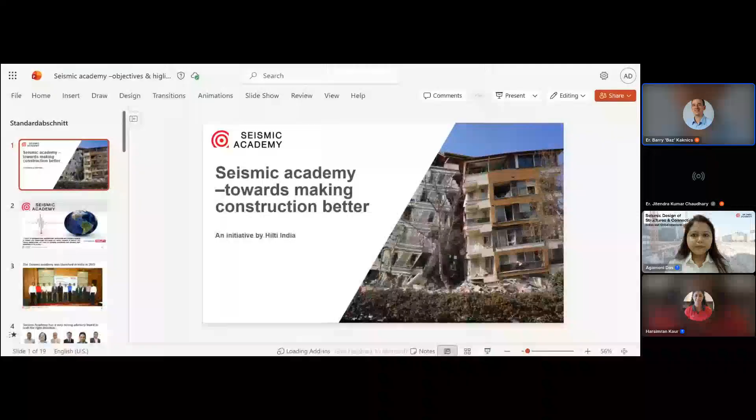This academy was launched in 2019, and we have a very strong advisory board with us from academia and industry, and we engage them through different activities.

You can see on the screen some quarterly and trimester activities we do, like quarterly webinars, the second one being today's. We do a lot of workshops frequently with IITs and different associations. We release trimester publications on seismic topics, to exchange knowledge, gain expertise, and elevate it further.

We also try to be involved in all the national level conferences organized by major associations in India. We present technical papers there, and we are involved with some IITs through research and testing based on requirements and industry objectives.

We also conduct an annual conference every year, generally in October. We have a dedicated website where we publish this kind of information on earthquake related topics.

This year we also started one online event, a quiz competition, and we got good participation there. The quiz competition was on the topic of earthquake safety and strengthening of structures.

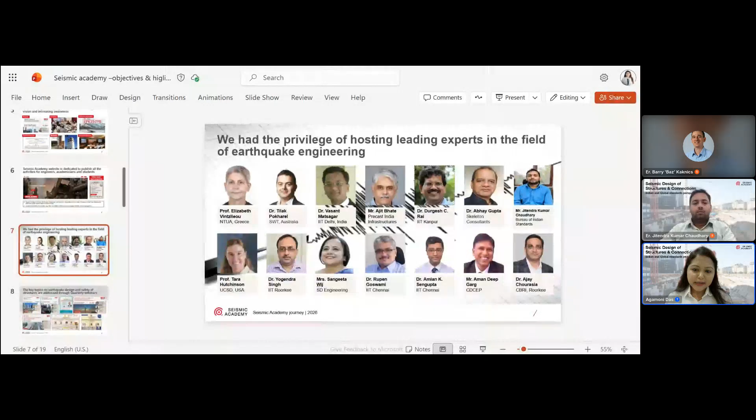We also had the privilege of hosting leading experts in earthquake engineering from academia as well as industry. These are some topics very much related to earthquake design and safety of structures that have already been covered through webinars and journals.

We have a close collaboration with NIDM, BIS, BMTPC, DDMA. We are also associated with Indian Buildings Congress, Indian Association of Structural Engineers, ISC, IIT, ICSRI, and other platforms. This is a sample of research and testing which we conducted at IIT Roorkee.

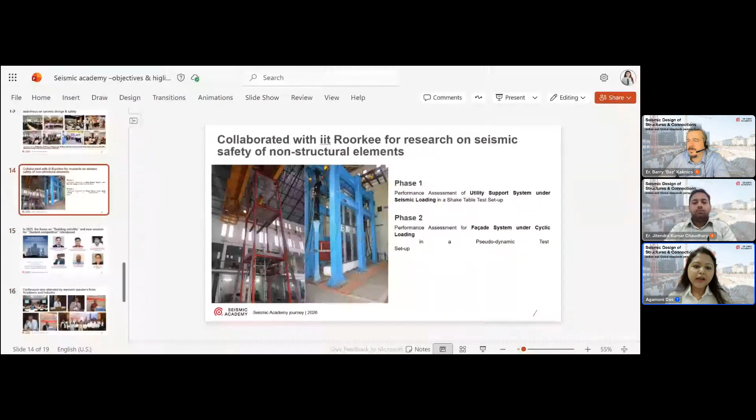In 2025, the conference topic was building retrofits, and this year the conference date is 23rd October, a Friday, with the topic seismic strengthening from shed to safe.

We have already released the preliminary flyer and agenda, which I'll be sharing here as well, and the final agenda will be decided by July. I'll also share it with all participants, and we really welcome you to participate and contribute. With this, I'll end my part.

Let us come together to make a meaningful impact, because Seismic Academy's objective is engineering resilience through seismic excellence.

With this, I will introduce our speakers for today's main technical sessions. We have Engineer Jitendra Kumar Chaudhary with us. He has over 5 years of experience in standardization related to building materials such as cement, concrete, supplementary cementitious materials, testing of cement and concrete, pozzolanic materials, concrete mix design, design of concrete structures, earthquake resistant design, construction, and full scale testing of structures. He is presently serving as member secretary of the Cement and Concrete Sectional Committee CED2 and Earthquake Engineering Sectional Committee CED39 in BIS.

Important achievements include comprehensive revision of earthquake safety standards IS 1893 Part 1, currently in process, revision of the earthquake zone map of India, earthquake resistant design of base isolated building standard IS 1893 Part 6, 2022, comprehensive revision of blast loading standard IS 4991, formulation guideline of post earthquake safety assessment of buildings IS 18289, which is very much important for today's topic, landmark formulation of standard on packaged dry mix concrete IS 18685, formulation of new standard on ultrafine fly ash IS 19058, and revision of IS 6461, glossary and terms related to cement and concrete.

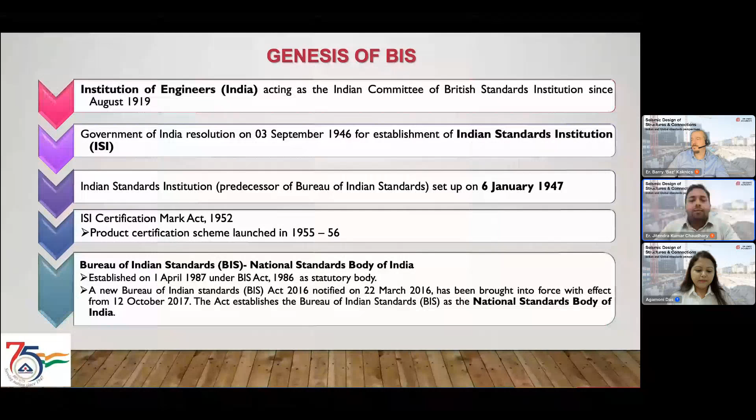The very first is the standards formulation, which you all are aware about, the different standards which have been published and formulated by the Bureau of Indian Standards. Another one is the product certification scheme. You all can see the ISI mark on various products which you purchase through the market. If you just go and see around in your home, you can see the ISI mark on most of the products and articles. So that comes under the product certification scheme.

Similarly, we have the foreign manufacturer certification scheme, laboratory services, and promotional and consumer awareness activities. We have a dedicated training center for capacity building and dissemination of information about standards at Noida, called NITS, the National Institute of Training for Standardization. We also have the laboratory recognition scheme, where we give recognition to the various private and government laboratories which are NABL accredited. We also have the hallmarking scheme, where we give hallmarks to various gold and silver jewelries, which has recently been mandated by the Government of India, that all gold and silver jewelry be produced using hallmarks.

Then we have the management system certification, where ISO 9001, ISO 14001, and other management system certifications come in. And the last one is the compulsory registration scheme, which is very similar to product certification, but it mainly deals with electrical and electronic goods.

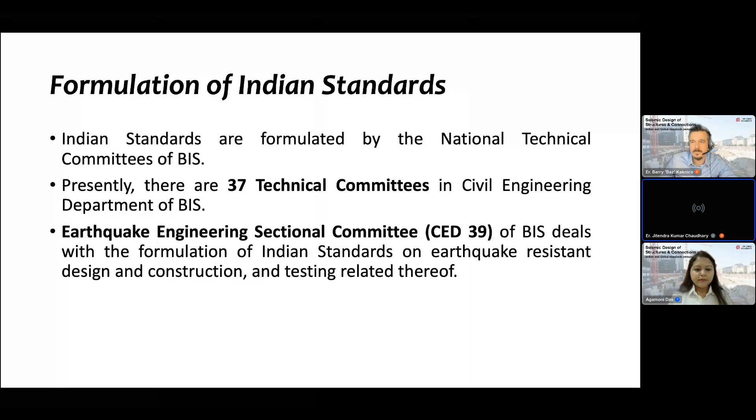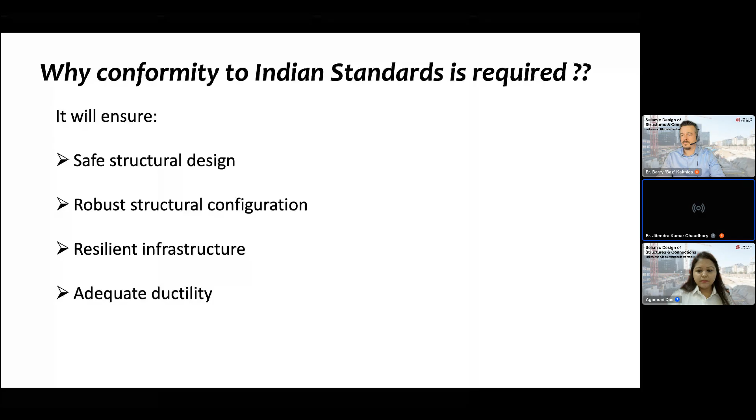Now, just quickly informing about the standardization process, formulation process. This is very similar to what other national standards bodies as well as ISO, the International Organization for Standardization, which deals with development of standards at the international level, follow. So this formulation process is much similar to the ISO development process also.

So first we receive the project proposal. This can come from anybody, any organization, any individual, any person who is practicing. Once the proposal is received by the technical committee, it gets scrutinized by the committee to check whether it has all the aspects, and if found suitable, we go to development of the standard. If it has any deficiency, the committee refers back and asks for broader information or supporting documents.

Once this project proposal is accepted by the technical committee, we go to the next stage, formulation of the working draft, the initial working draft, which is formulated by a couple of 4 to 5 experts of the work committee.

Once the working draft is prepared, it goes to the preliminary draft stage, where we invite comments, feedback, and suggestions from all the members of the committee representing in the committee. Once the committee has a broad consensus on the preliminary draft, it moves to the next stage, called the wide circulation stage.

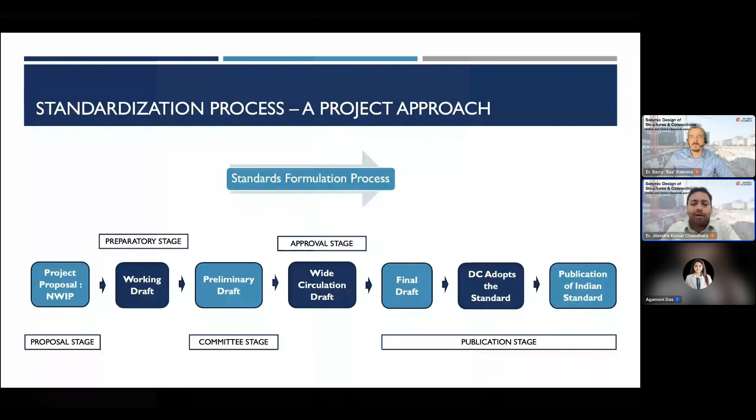Now, coming to the committee dealing with formulation of standards on earthquake-resistant design, this is the committee already informed, CED 39, and the details of the composition are there. We have representatives from R&D bodies, academia, individual experts, associations, government agencies, public sector undertakings, and industry associations also. These are all key experts giving their feedback and helping us in the development of the standards.

Anybody who wants to volunteer in the formulation of the standards can always write to BIS for their nomination. The committee will consider and see where your expertise and knowledge can be recognized and utilized, and we will inform you about the decision recommended by the committee.

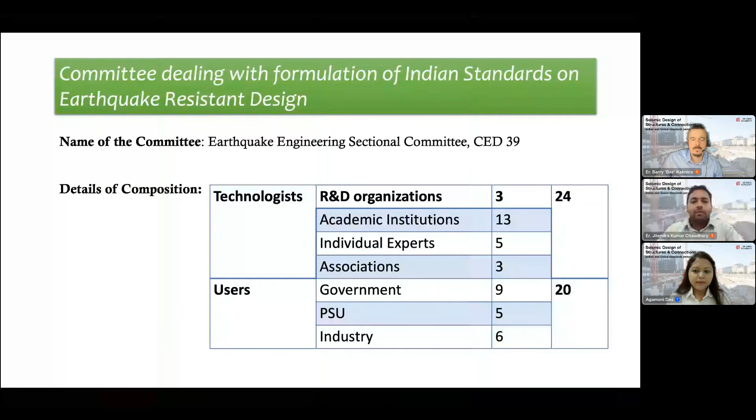Now, why is earthquake-resistant design essential? If you look at the seismic zonation map of the country, you can see that around 61% of the Indian landmass is prone to moderate to severe earthquake shaking, meaning the regions falling in zone 3 to zone 5 and 6.

And there is, as you know, a huge amount of non-engineered building stock in the country, where even leaving aside earthquake resistant design features, the basic design requirements recommended by the standards and codes are also not utilized.

Then the third aspect is rapid urbanization and infrastructure development in the country, and of course, ensuring disaster resilience and preparedness. Considering all these aspects, it is very much required that earthquake resistant design be taken care of while developing new structures, and also that structures already built undergo timely monitoring, review, and assessment, so that a proper retrofitting scheme can be selected.

There is a very common saying that earthquakes don't kill people, but buildings do. If buildings do not have features which are able to resist lateral loads, you will not get sufficient time to escape from your buildings or houses in case of earthquake shaking. That's why it is required that earthquake resistant design should be incorporated while designing any structure or house.

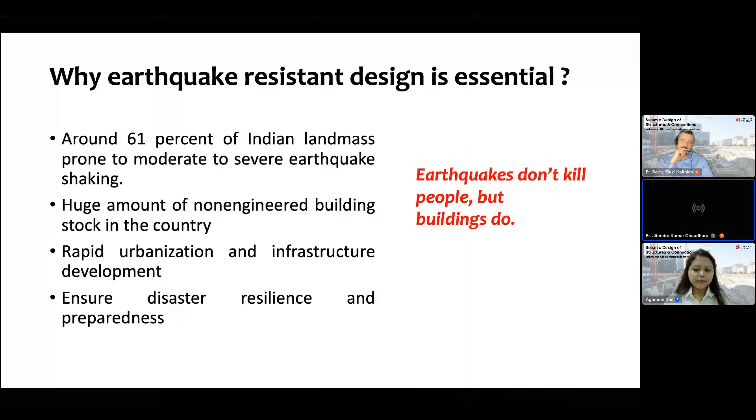So what is the basic philosophy of earthquake resistant design which we engineers have been practicing for past decades, many decades? Basically, we categorize the shaking which comes from the ground during an earthquake event into 3 categories: minor shaking, moderate shaking, and severe shaking.

Minor shaking is very frequent. If you open the Bhukosh app of the National Center of Seismology, or visit the website of the National Center for Seismology, every day you can see there are small earthquakes of magnitude 1.5, 2.5, 3, 4. All these different magnitude earthquakes are coming every day. So these shakes we consider in the minor shaking category, which is very frequent, coming every day.

Maybe in one day it can come once or twice or thrice. For such minor shaking, there should be no structural damage and no non-structural damage to the buildings.

Then the second level of shaking is called moderate shaking, where some level of non-structural damage would be there, but there would be no structural damage.

And then the third comes as the severe shaking, which has magnitude more than 6 or 7. That is very infrequent, but it will lead to structural damage and non-structural damage.

But our philosophy should be that the structure in any case should not collapse. Structural damage, non-structural damage can occur, maybe they will be repairable, maybe not repairable, but in any case the structure should not collapse. That is the primary intent of the earthquake resistant design philosophy, to prevent the collapse of a structure and thereby protect the loss of human and animal lives. This is the basic philosophy which engineers generally adopt during earthquake resistant design.

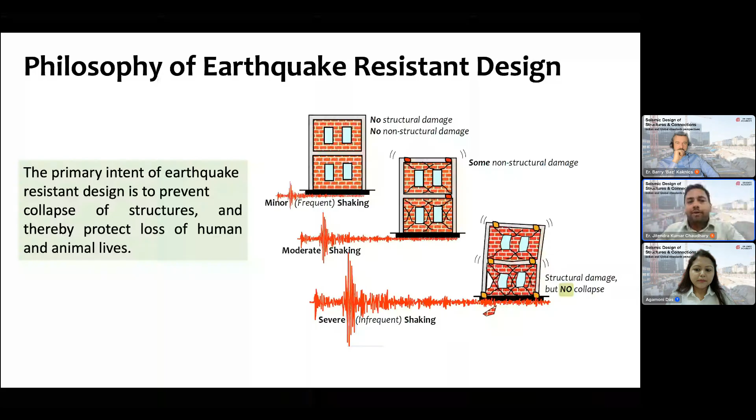Now, coming to the standards which deal with earthquake resistant design. As this committee have already informed, as of now we are having a total of 16 standards which exist on seismic design.

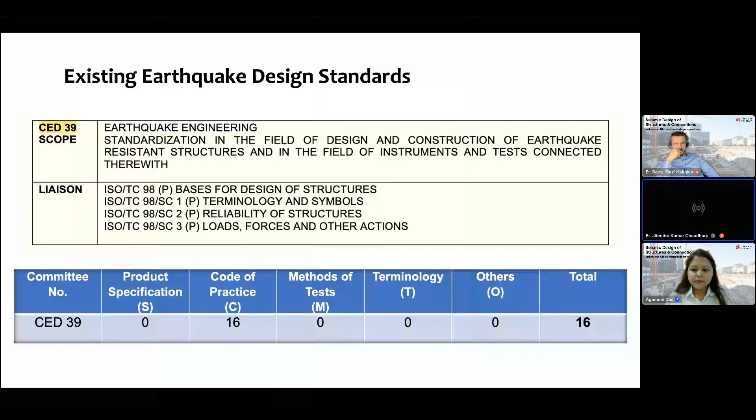So these are a list of some of the Indian standards on earthquake resistant design which are available. You know that the parent seismic design code in the country is IS 1893, and various parts of 1893 are already available, so those you can see. Apart from IS 1893, we have IS 4967, which has recently, last year, been revised - that is the instrumentation of dam projects. Then 4991 part 1, that is on blast resistant design, that also has been recently revised. And then various series of standards which are available for seismic strengthening and assessment, basically.

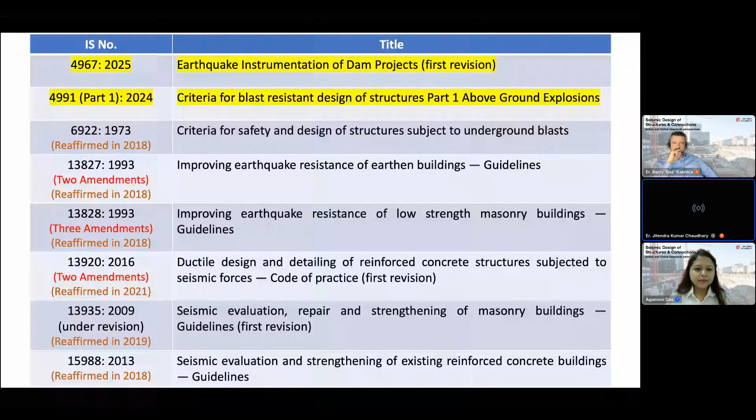Then coming to recently published standards, IS 4967 already mentioned. Part 4 on industrial structures, including stack-like structures, has been revised in 2024. And of course the blast resistant code, that is also revised in 2024.

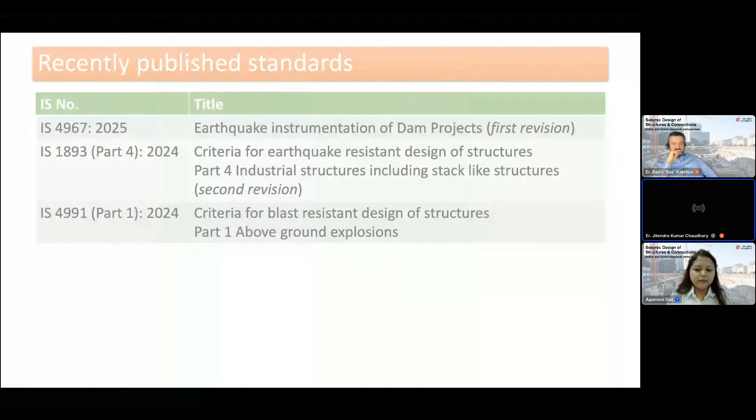So these are the standards which are already existing, already available. You can download them from the BIS website.

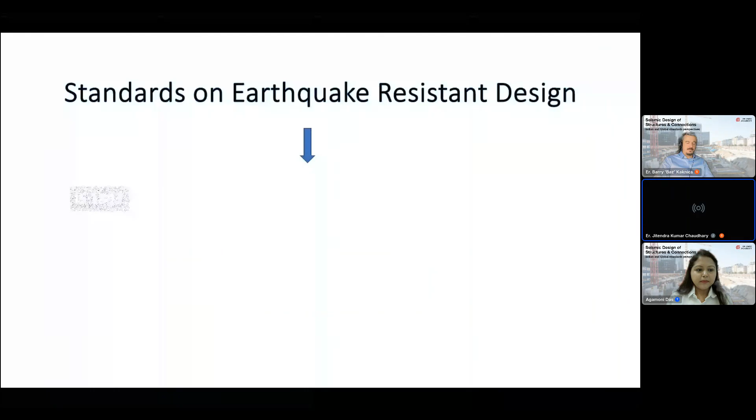Now, what the committee is currently doing - we are in the process of harmonizing the various earthquake codes. In this process of harmonization, the committee has divided the standards into 3 broad categories: one is IS 1893, one is IS 13920, and one is IS 13935.

IS 1893 will be dealing with the estimation of earthquake hazard and analysis of structure. It will help you estimate the hazard coming from ground motion and all the parameters involved in the calculation of earthquake forces and load combinations as well. So from 1893, you will get the forces coming on your structure, which we call the earthquake demand.

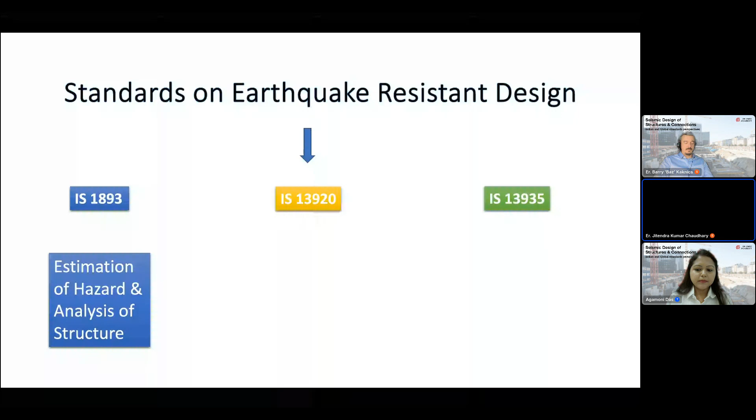Now coming to IS 13920, that will deal with design and detailing of the structure. Design and detailing means once you have estimated all the loads coming on your structure, now you have to design your structural members - beams, columns, slabs, reinforcement, detailing, everything - to adhere to the demand coming from the earthquake forces.

So that's why we call it IS 13920, as the capacity, basically estimating the earthquake capacity. Now IS 13935 will be dealing with the safety assessment and retrofitting of the structure. And remember, this is only dealing with the earthquake safety assessment and retrofitting, not the general retrofitting.

I would like to inform that there are other technical committees in our civil engineering department, and they have taken up the subject of structural retrofitting of structures to consider the other aspects required for retrofitting, such as deterioration of concrete structures. But IS 13935 will be dealing with the seismic safety assessment and retrofitting.

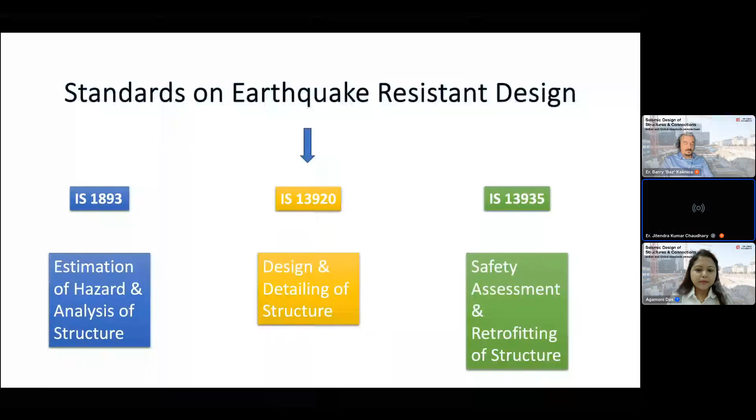Now, under all these three verticals, we have divided the standards into various parts. Part one deals with the general provisions, applicable to all types of structures, all categories. Then we have the liquid retaining structures, both elevated and ground supported. Water tanks will be covered here.

Part three deals with bridges. Part four deals with industrial structures and facilities. Part five deals with buildings, as buildings are one of the important categories of structures. Part six deals with base isolated buildings. Part seven deals with long distance pipelines. Part eight covers coastal structures, then steel towers, tunnels, and earthen embankments and earth retaining structures. So as of now, the technical committee has divided the standards into these three verticals, covering all these 11 parts.

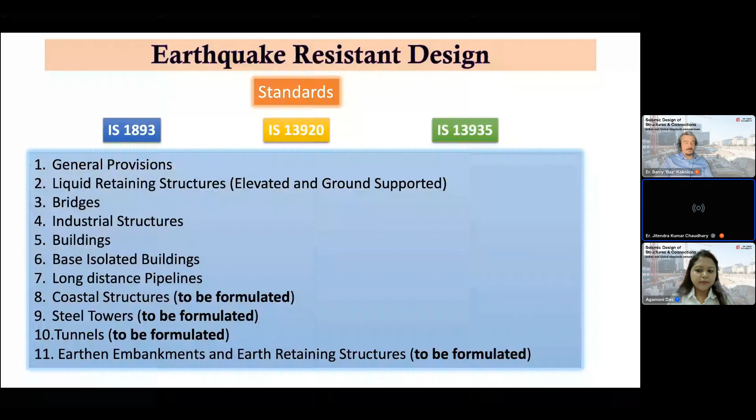So now coming to the first vertical, that is IS 1893 part 1. Part 1, 2016 is already existing, and in the currently ongoing revision of IS 1893 part 1, one document has already been released in 2025, but because of the representations we received and directions from the Government of India, the committee is currently reviewing the provisions of the standard, and very soon we will come to the next version of the document.

So the proposed changes in the ongoing revision are: first, the introduction of the revised seismic zonation map of India based on probabilistic seismic hazard assessment, which we call PSHA in short. PSHA is an internationally accepted hazard assessment approach used to estimate earthquake hazard at a specific ground site. Most countries have already accepted and added the PSHA approach in their seismic codes.

And we are also in line with introducing PSHA in the seismic standard. Second, provisions related to buildings will be covered in part 5, as I've already mentioned. Then design horizontal acceleration coefficients have been specified for each earthquake zone for use in strength and serviceability design, just like in the previous versions of IS 1893.

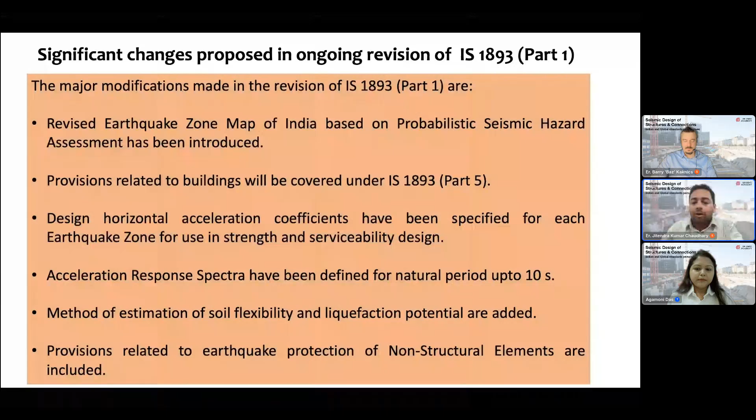So that's why ensuring their safety is also important. The present seismic zonation map of India is basically the one shown in the 2016 version of IS 1893. The present zonation map introduces zone 6, and it is currently under review. We will soon come up with the revised version of the standard. Till then, IS 1893-2016 will be applicable in each and every aspect.

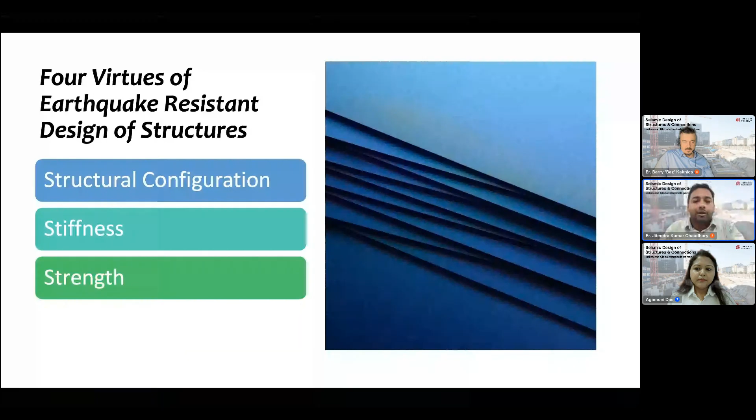Now, the four virtues of earthquake resistant design of structures generally considered during design: one is the structural configuration, that is robust structural configuration. Second comes stiffness, then strength, and very important is ductility, to ensure adequate ductility in the members of the structure.

So this was all about IS 1893. Coming to IS 13920, that deals with earthquake resistant design and detailing of the structure. As I already mentioned, our earthquake demand will come from IS 1893, and for that demand we need to design our structure. So the capacity design of our structure will come from IS 13920. This standard provides the requirements for design and detailing by capacity design of select structural elements, connections, and joints of all types of structures.

It provides details of construction for masonry, concrete, and structural steel. The provisions of the earthquake safety standards will be added to the ones already specified in their respective basic design codes, like IS 1905 for masonry structures, IS 456 for concrete structures, and IS 800 for steel structures.

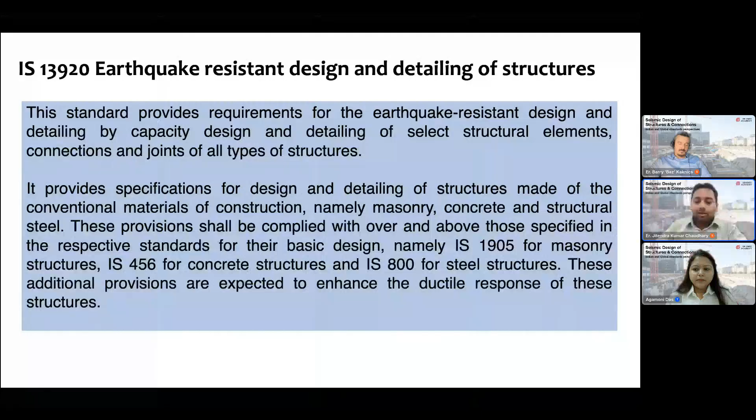IS 13920-2016 is currently in practice and presently existing, but that 2016 version was only dealing with reinforced concrete structures. IS 18168, published in 2023, deals with design and detailing of steel buildings, because we received feedback from industry and associations that we should have capacity design standards for steel buildings also, since as of now only RC structures have been covered in IS 13920. So the committee formulated this in 2023 for the design of steel buildings.

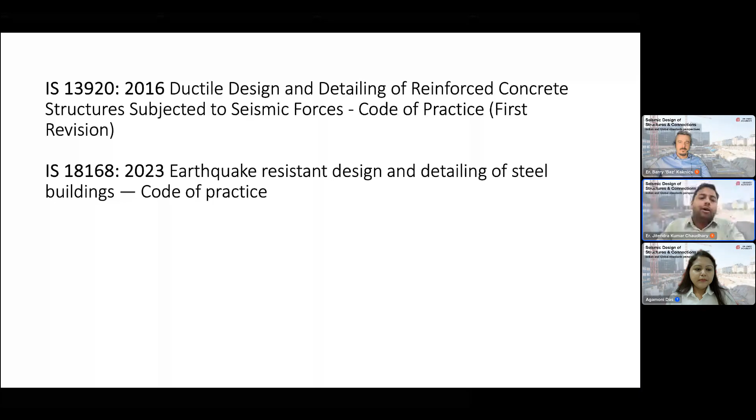So in the ongoing revision of IS 13920, we have divided the content of the standard into 4 different sections. Section 1 covers the provisions applicable to all types of building typologies available. Section 2 deals with masonry buildings. In the masonry section, we have unreinforced masonry buildings and houses, confined masonry buildings, and reinforced masonry houses.

And what are the provisions available? That also we will consider in the masonry buildings. Third, we'll deal with concrete buildings and concrete structures, and fourth will deal with steel buildings.

So the revised version of IS 13920, the part dealing with buildings, will be more elaborative and exhaustive, so that any consultant or engineer engaged with the design of buildings will have one standard only, and will get all aspects related to buildings of any typology for their convenience and use. That was the basic philosophy of dividing buildings as a separate part from Part 1.

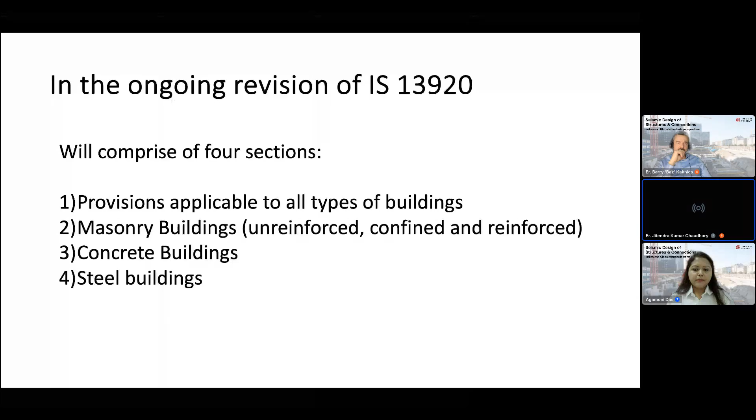Then, of course, the revision of 13920 and 13935. As I already mentioned, 13920 will cover the design and detailing aspects, and 13935 will cover the assessment and retrofitting of structures.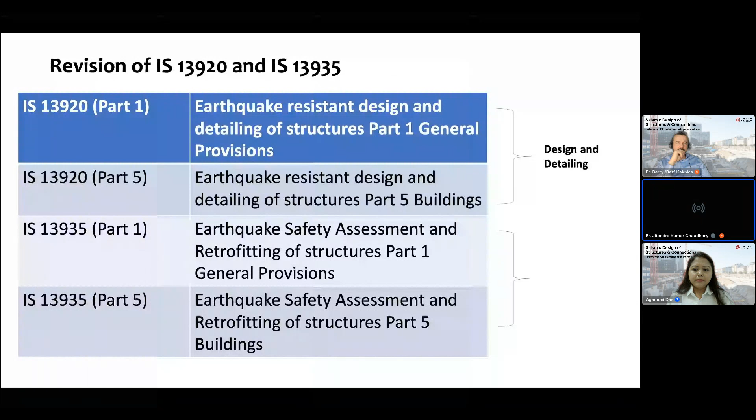Before moving to IS 13935 details, let me quickly talk about different lateral load resisting systems, because today we are discussing seismic design and seismic philosophy. So let us understand some things about lateral load resisting systems. In these systems, we have braced frames, which are very commonly seen in steel buildings, railway bridges, and steel bridges, providing for low to mid-rise buildings also.

Then we are having the rigid frames or the moment resisting frames in low-rise buildings, both concrete as well as steel. We are having different categories in the moment resisting frame: ordinary moment resisting frames and special moment resisting frames.

Along with the moment frames, we also have other structural configurations called dual systems, and reinforced concrete shear walls, which are added in mid to high-rise tall buildings. All of these are common lateral load resisting elements incorporated in buildings and structures, and they should be properly designed and detailed for ductility requirements to resist the effects of earthquake and the lateral loads coming on the structure. For design and detailing, IS 13920 provides the recommendations.

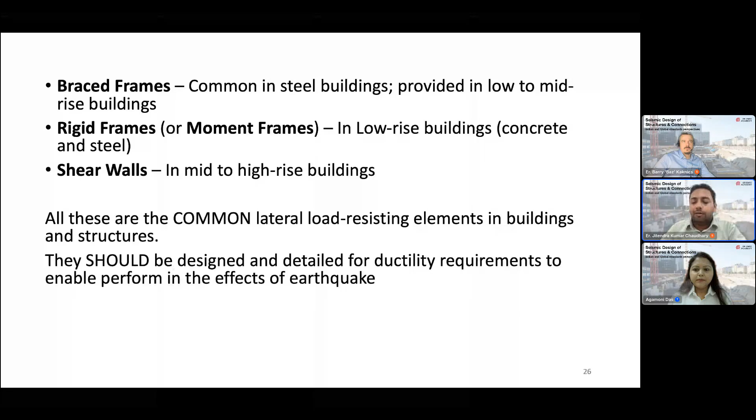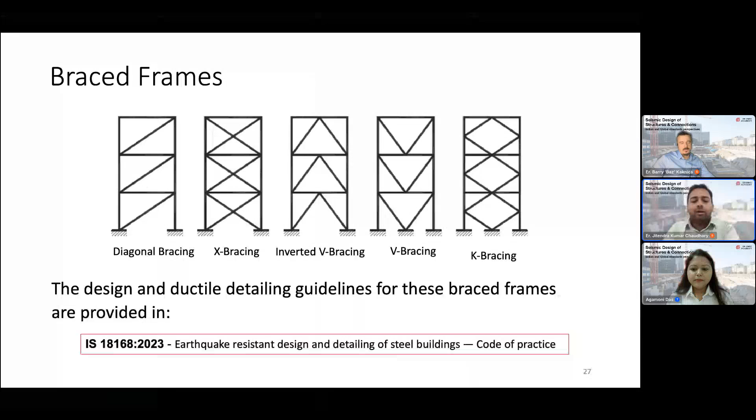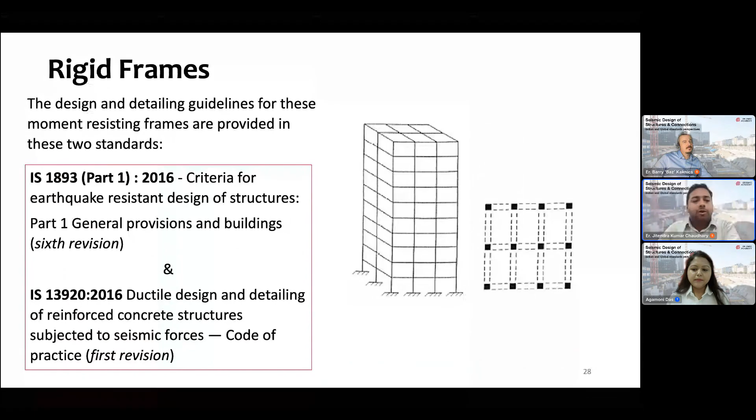These are different types of braced frames commonly used in buildings and structures. Design and detailing guidelines are covered in IS 13920 for reinforced concrete structures, and for steel buildings it is covered in IS 18168/2023. For rigid frames, that is moment resisting frames, provisions are covered in IS 1893 Part 1 2016 and IS 13920 2016. Then coming to shear walls basically.

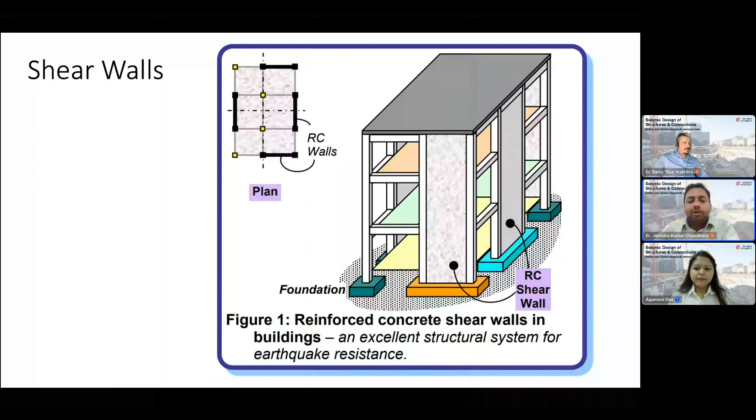These are the RC shear walls, which basically begin from the ground and continue directly up to the top level of the building or structure. Shear walls are also provided in various different shapes - rectangular, L shape, C shape - depending upon the location in the building or structure where they have been included.

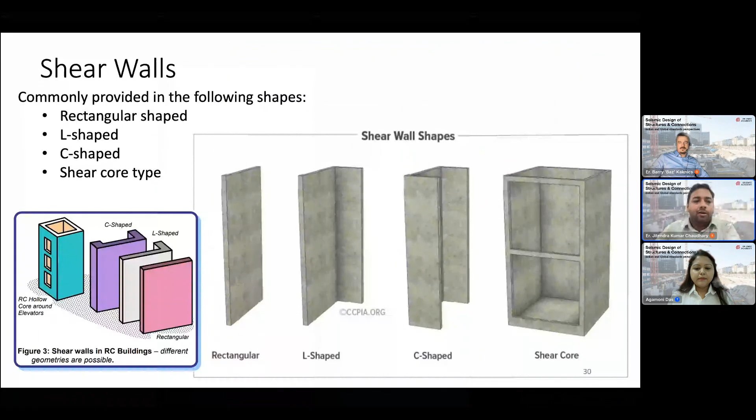Shear walls have to be located symmetrically to take the best advantage of their combined action. Symmetrical orientation helps in reducing and avoiding unnecessary forces, and also reduces torsional effects coming on the building. That's why symmetric location of shear walls along the perimeter of the building is very much desirable, and symmetry always performs best in case of earthquake loading.

Of course, in the present scenario with rapid urbanization and development, we are now putting more importance on aesthetics. But where you have the opportunity, try to make the structure as symmetrical as possible. For unsymmetry in both horizontal and vertical directions, IS 1893 provides recommendations on how to deal with those types of irregularities.

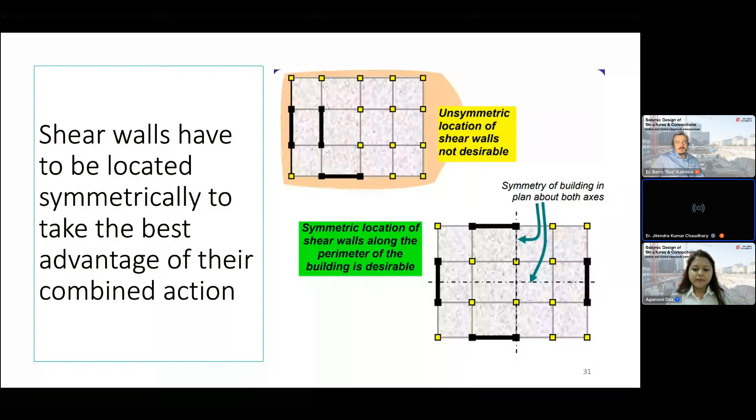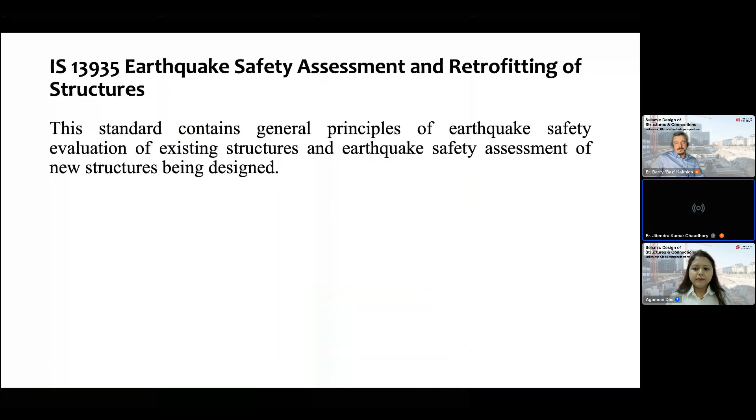Okay, so now let us come to IS 13935, which deals with the safety assessment and retrofitting of structures. It provides the general principles of earthquake safety evaluation of existing structures, and also the earthquake safety assessment of new structures being designed. These are the major changes made in this particular revision.

In this revision of IS 13935, we have introduced 5 levels of evaluation of a structure, which we generally call 5-level telescopic evaluation of structures. The very first level is the common, easy one, based upon rapid visual survey only - visual screening. Moving to the next levels, it increases the level of rigor, increasing the calculations and considerations needed for the assessment. In this way, we have introduced the 5 levels of evaluation.

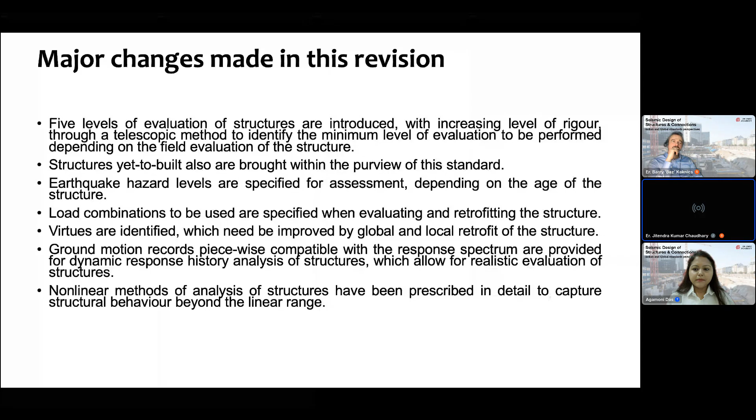Structures yet to be built are also brought within the scope of these standards. Hazard levels are specified for assessment depending on the age of the structure, and load combinations are used while evaluating and retrofitting structures. The ground motion and non-linear methods of analysis have also been prescribed in further detail compared to the earlier version of the standard. So this is basically the 5 level telescopic evaluation of the structure.

The very first one is the field level evaluation, which is a qualitative method based upon rapid visual survey. You go to the site, observe the buildings, and note the things you can directly see through your eyes - how deterioration has happened in beams, columns, slabs, how much cracking has occurred, what kind of damage has been done, the building typology - whether steel, concrete, or masonry - and the type of soil on which the structure is lying.

So all this kind of assessment basically comes under field evaluation, and we have given a detailed form in which all the assessment things are to be put down, with a checklist given there. Depending upon that checklist and the evaluation parameters, we have given one index, basically a performance index, and depending upon that performance index, we take the decision whether the structure can go for retrofitting or strengthening, or we need to go for demolition of the structure.

In any case, demolition is the last option for any kind of building or structure. We always try to see if there are any chances or opportunity that we can strengthen and improve the performance of the structure, so that its life can be further extended to some more years. So all that comes under field evaluation.

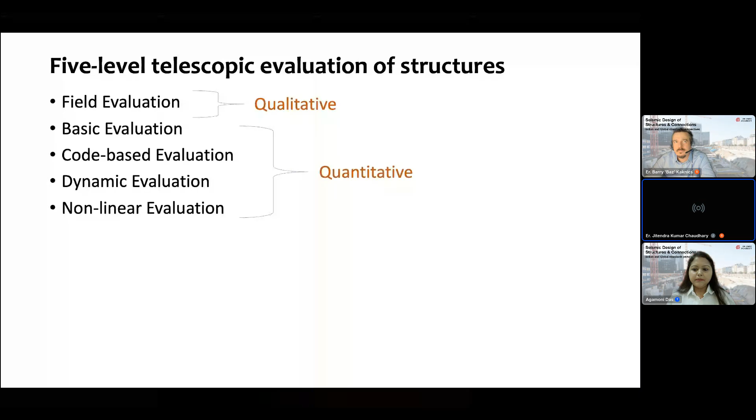So these five levels of evaluation procedures have been included in this revision of IS 13935. Of course, all the details about how to carry out this evaluation and assessment, and which parameters are to be chosen, all the different forms and things, everything has been included in the present revision of IS 13935. Now, the other new standards which are under development.

One is basically the full-scale prototype structural testing of structures for earthquake loads. This has been adopted because in the field of earthquake engineering and science, with each passing year we are seeing so much of the latest technological developments and new technologies coming into the construction industry. But at the same time, while using all those new and emerging technologies, we also need to assess and measure their performance, especially in earthquake resistant design in regions very prone to earthquake shaking, to see how much the performance and feasibility of using such new and emerging technologies is in those regions.

So as of now, although there are many laboratories and R&D bodies in the country already doing prototype and structural testing, we were not having any standard giving the requirements of what type of test to be done, what type of specimen size and prototypes, and all the things to be taken into consideration while testing structures. Those kinds of recommendations were not available. So the committee thought let us come up with provisions in a standard where we can give guidelines to laboratories and industries on these things to be considered for structural testing, and with that philosophy this particular proposal has come out.

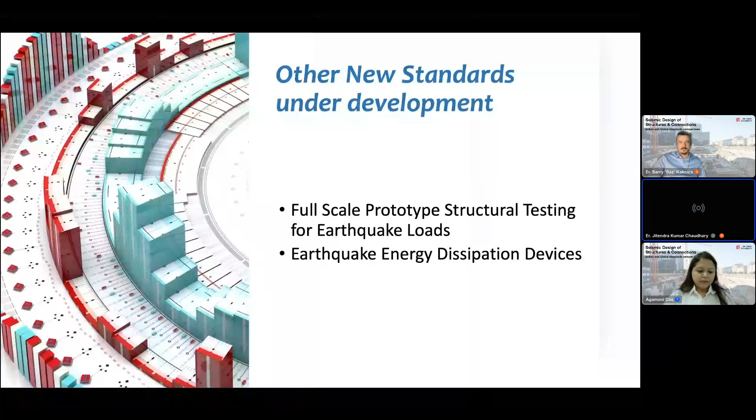The next one we are coming up with is the document on earthquake energy dissipation devices. Basically, provisions and specifications about seismic dampers, which are available—many types of seismic dampers are available—but as of now, just like structural testing, we don't have any recommendation for energy dissipation devices. So in that area also, the committee is looking, and we will very shortly start working upon this particular area. Any colleague or participant who wants to contribute in this area can write to BIS, and the committee can consider their expertise and information.

So these are all the things which are basically done by the Bureau of Indian Standards. You know that we are the national standards body, which is mainly involved in the establishment of such documents.

The implementation of the document is the second key aspect required to fulfill the requirements and provisions of the standard at the field level. In order to fruitfully implement the provisions of the standards laid down by the technical committees of BIS, the role of the states becomes very much prominent and required.

What actions are required from the state bodies? One is basically capacity building. Capacity building involves the technical education of the principles of engineering and science to all the practitioners engaged in building design and construction. This should be a regular and dynamic process, with authorities carrying out capacity building programs time to time to improve the knowledge and understanding of people engaged in structural design.

Then, continuing education of engineers, and we should have licensed engineers. Many states have already introduced this concept, and it should continue so that structural engineers are competent enough to carry out structural design and analysis, along with training of executive agencies and government bodies. All these fall under the category of capacity building and training programs.

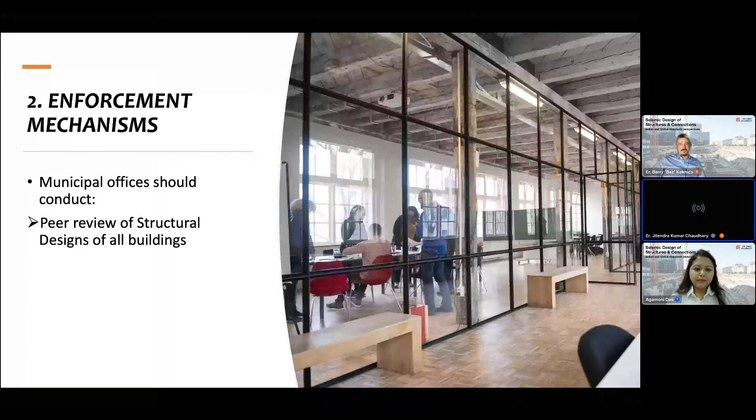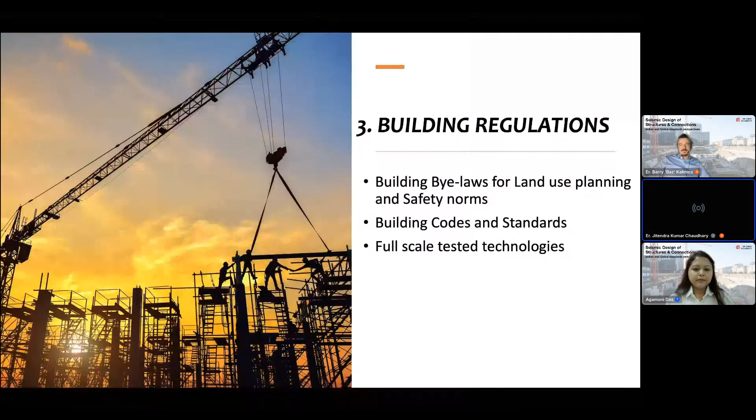Now, what are the various instruments used for building regulation? We have the Town and Country Planning Act and Development Act, which give policy and administrative guidelines regarding town and country planning. Those acts and regulations can refer to the building codes and building standards within them.

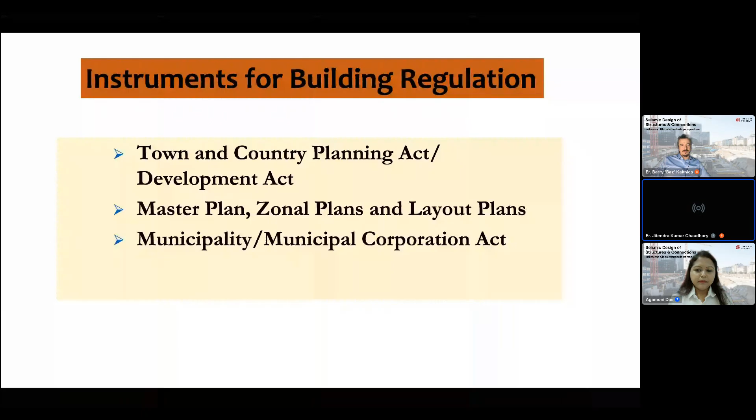Then we have the master and zonal plans, layout plans of every state and district. Then we have the municipality and municipal corporation acts, which give the guidelines, and of course the building bylaws, which give the regulations for building design and construction.

This is a publication greatly worked upon by BIS and NDMA, the National Disaster Management Authority, published in 2021. It is basically simplified guidelines on earthquake safety of buildings from the National Building Code of India 2016. This book gives that kind of information.

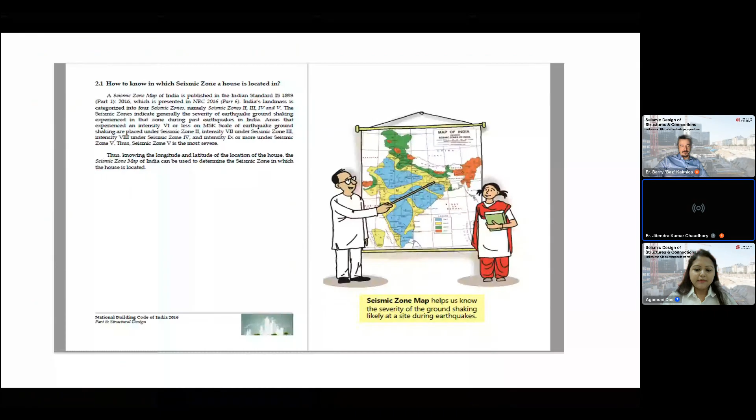It is basically a dialogue between two characters of this book, where the girl is asking questions about earthquake safety, seismic zones, how to design structures for lateral loads, and her grandfather is giving all the answers. It's a very good book—you can go through this publication and get more insights about earthquake resistant design and seismic zoning. These two characters, Chacha and Muni, cover the whole dialogue between them.

This is a very important thing I would like to inform all our audience and participants joined today: this is a recent publication of the Bureau of Indian Standards, the revision of the National Building Code of India. This is SP7 2026, National Building Code of India. This is the current revision of the document, and as the earlier version also had two volumes, here also we have two volumes.

Volume 1 covers the introduction and recommendations regarding building materials and structural design aspects, organized under 8 sections: Section 1 on loads and load effects, Section 2 on soil and foundation, Section 3 on timber and bamboo, Section 4 on masonry, Section 5 on structural concrete, Section 6 on steel and composite construction, Section 7 on prefabricated concrete construction, and Section 8 on glass and glazing aspects.

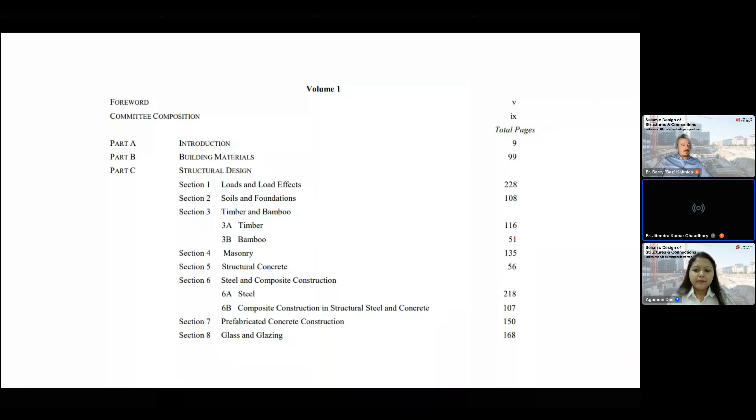Volume 2 deals with building services, including lighting and natural ventilation installations, air conditioning and HVAC, acoustic and sound installation, lifts, plumbing services.

It also covers fire and life safety aspects. I would request all of you to go through this revised document on the National Building Code, which you can download free of cost from the BIS website; it's already available on the front cover. This revised publication has been prepared by many experts engaged in this revision exercise, which took more than 3 years, and now we have come up with this new publication.

For information about all the various standards on design, codes of practice, materials, specifications, and test methods, not only for cement and concrete but also other building materials, here is the latest Program of Work, POW. I've already given the link in the slide, so you can download this Program of Work of the Civil Engineering Department and learn about all the standards presently available with this department.

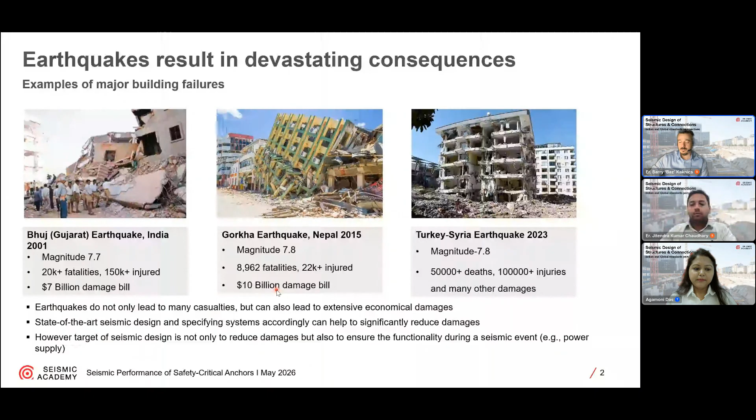Statistics show that on average, there is at least one earthquake happening every day globally that the general public actually notices and reports about. For us engineers, we already talked about seismic demand, and seismic risk is a similar but broader definition. I want to spend a minute recovering what seismic risk is, which is essential in our engineering practices. We define seismic risk as a combination of two things: one is the actual hazard, and the other is the impact of the disaster. The hazard is something we cannot really control; earthquakes are natural occurrences, right?

So we cannot really change that. We need to live with this. What we can control in order to reduce the seismic risk is if we can mitigate the impacts of the disaster, this can make a significant difference. And this is what we are going to cover in today's presentation.

It is critical to clearly define, quantify, and communicate the seismic hazard. We saw some great examples from the previous presentation about Indian standards and the seismic hazard map being updated. These are great tools for engineers. What is not so obvious, though, is how we can reduce the impacts and vulnerability of these structures. And anchors are no exception from these.

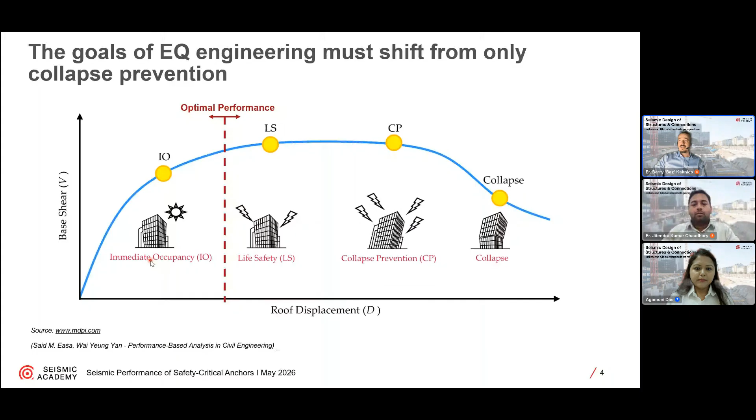Today we are zooming in. I promised you that my favorite building products are fasteners and anchors. So we talk about post-installed fasteners mainly today, which are connecting either the primary structural components or sometimes the secondary structural components. We simplify these and we just call these anchors, either structural anchors or non-structural anchors.

What I want to also emphasize here today is that from the seismic engineering point of view and from the risk point of view, they are equal. We don't distinguish whether it's a structural connection or non-structural connection. Where we draw the distinction is whether the connection is a safety critical one or a non-safety critical one. Structural and non-structural, equally important, and I will explain later why this is the case.

I brought a couple of definitions today. So how do we define safety critical? This is taken from the latest edition of the Australian Anchor Code, which says that fastenings whose failure may result in collapse or partial collapse of the structure, or endanger human life, or result in the loss of functionality of higher importance level buildings, or cause considerable economic loss.

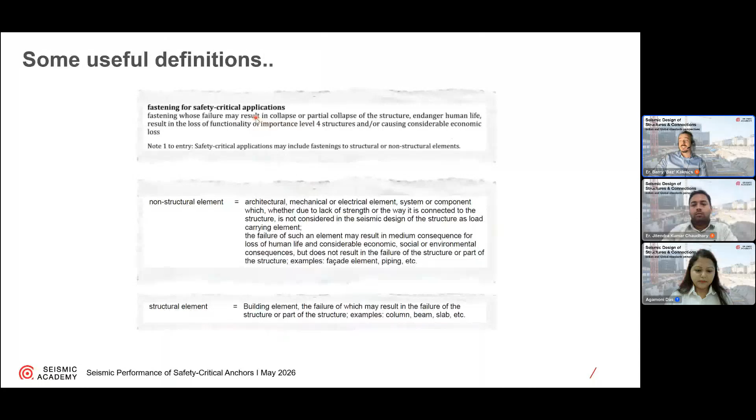Please note the shift in the engineering mindset from pure collapse prevention and human life protection. We are now also going towards reducing economic loss and maintaining the assigned building function, which ties into reducing the time and cost of recovery and reoccupancy. That's very important - structural, non-structural, secondary questions.

These are some of my favorite photographs, I believe from the Christchurch earthquake 13 years ago in New Zealand. These photos show that the buildings are mainly okay from a structural point of view, but what happened inside is a tremendous level of non-structural damage - various building service equipment, pipes, interior finishing items, suspended ceilings, partition walls, MEP fixings and pipe work all collapsing.

Not sure if you know the origin of seismic anchor qualification. It started in the United States after the 1994 Northridge earthquake, a major disaster event in California in the mid-90s. They noticed that significant building damage happened to critical infrastructure, including hospitals, and they had to fully shut down and evacuate 11 hospitals in the region.

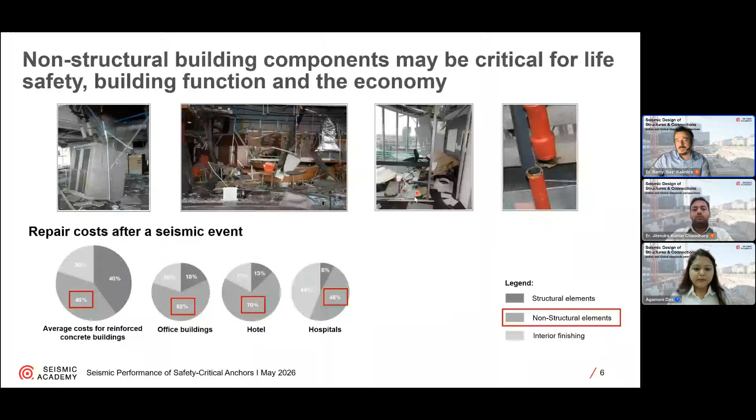So what can we do when it comes to these connections, and why did the US start putting a lot of research in the mid-90s into fastenings? Because they realized the failure of non-structural components is a bigger issue and a bigger risk than they ever expected. So they looked into what the seismic demand really is on fastenings and anchors.

Here we need to talk about two things. In engineering practice, we separate the selection of anchors from the design verification of anchors - these are two separate steps. For the selection of anchors, we don't just select any anchor; we need to make sure anchors are tested against changes in loading pattern, meaning dynamic loading, either a pulsating tension force or an alternating shear force. But what else is happening, and this is super crucial, is changes in the base material itself.

The changes mean concrete cracks develop. When we drill a hole for a post-installed anchor, we weaken the base material - we actually create a notch effect. So when moment reversal happens to the structural part, for example a concrete slab or wall, and the moment is cycling and reversing, these anchor holes act as an invitation for concrete cracks.

And these concrete cracks oftentimes don't just open, but actually start a cyclic movement - they open and close. Just imagine a friction-controlled anchor installed in one of these holes, and the hole all of a sudden becomes 1 millimeter larger. You lose most of the friction, you lose most of the grip of the anchor, and the connection fails. So therefore we need to make sure anchors are properly qualified and tested against these changing conditions.

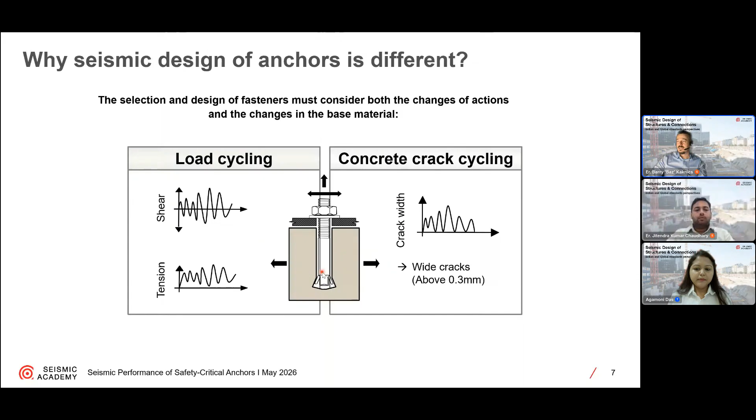In today's presentation, I'm going to talk about anchor qualification against seismic actions. And the next presenter, Ms. Agamoni, will talk about anchor design based on the new Indian codes of practice that were recently released to the industry. So here are the steps which are super important to understand how anchors are qualified.

The recently published IS 1946 Part 3 for bonded anchors and Part 4 for mechanical anchors include qualification criteria based on the best global practice, which is the European guidelines.

In Europe, we call these European assessment documents. This one is for mechanical anchors, the other one is for chemical anchors.

What was done very well, in my opinion, for India, where the seismic risk is at least moderate but often high, India decided not to go with the lower category, which is called category C1 in Europe. India voted to only adopt the best and the state of the art and more demanding anchor testing protocol, which is seismic category C2. I will show you what this C2 testing actually entails. So whether you open up a European document or the new Indian codes, it's very important to understand that seismic anchor in India equals category C2, the more severe category. That's the right decision to do.

Just to show you some of the tests that the anchors must undergo during seismic qualification. First of all, these anchors must be tested in cracked concrete base material. Cracked concrete is a must. When we talk about cracked concrete, there were multiple studies made globally, and they looked into realistic behavior of real structures, and they had to draw the line somewhere. They said that we don't allow anchors to be placed in or right next to the seismic hinges because it's almost impossible to quantify those.

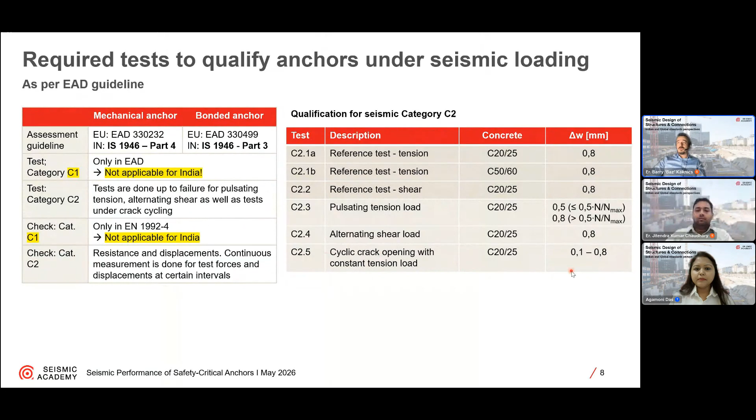So this is the crack cycling protocol. You can see that the cracks are opening wider and wider. This actually mimics moment reversal on the structural element, so opening and closing cracks. At the same time, compared to the reference test, they established that we start with 40% of the maximum reference capacity, then at a certain point increase this up to 50% of the maximum static capacity.

What happens? A lot of the anchors actually pull out at this stage. The anchors that don't can go on, but there is one remaining test. So after the static test and the cyclic crack test, there is also a residual capacity test. Remember what I explained about post-disaster recovery and making sure that the buildings we build and design are actually reoccupiable in a short amount of time. We want to ensure that these fastenings actually survive the severe earthquake and remain operational. They can be used further and their design life can be extended as well. That's again very important in modern seismic engineering.

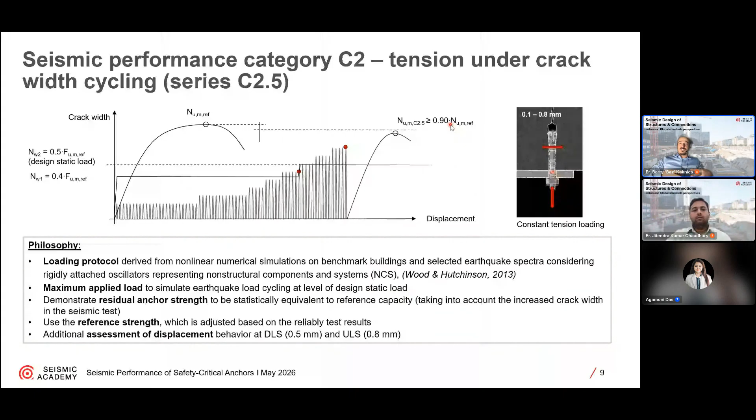So after this major earthquake event modeling and testing, the anchor still must be able to achieve 90% of its original static capacity. I reckon that's quite significant, and that really well underlines what I said at the beginning of my presentation. So that's from my side with regards to the qualification of seismic anchors. I'm very happy to answer any questions either now or towards the end in the Q&A session.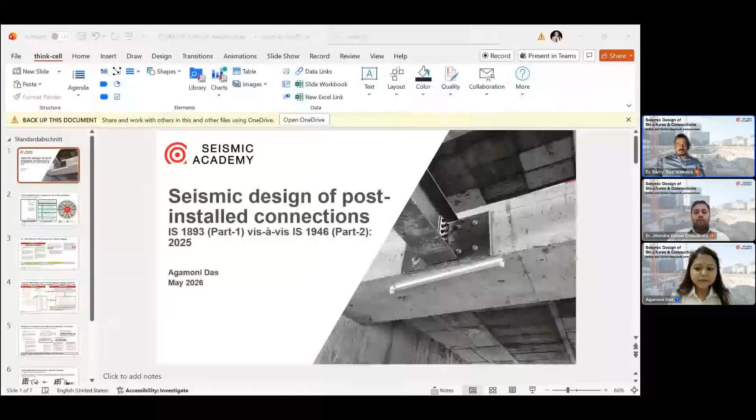Yes, it is. So I'll just discuss in brief what is the relation between IS 1946, which was launched last year as the first Indian standard for post-install anchors, and also with the Indian seismic standard, IS 1893.

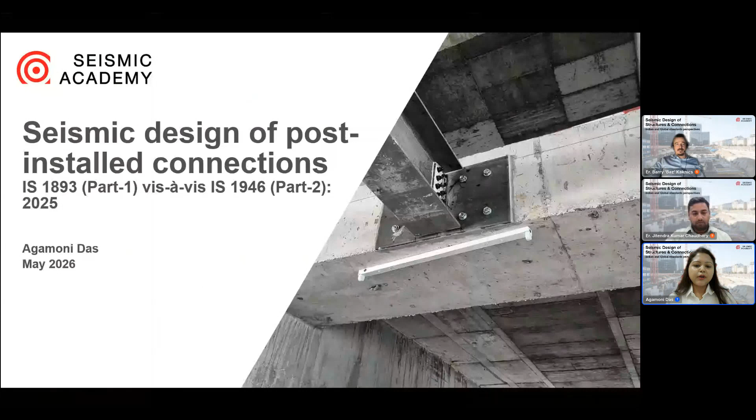Till now, under IS 1946, three parts have been released. Part 2 is for design. Part 3 is for the qualification of adhesive anchors, chemical anchors. Part 4 is for mechanical anchor testing and assessment. Part 1 is going to be released maybe next month, which is the general provisions of fixing devices. And part 5, for installation of post-install anchors, is under preparation.

So if I talk about IS 1946 Part 2, these are some highlights or key points which have been covered. The design of connections has been covered for static and seismic loading, considering both loadings are very important for Indian industry, Indian situations.

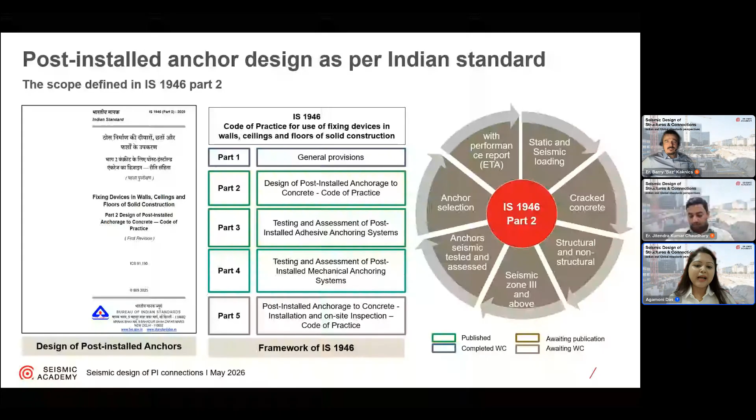Then, of course, cracked concrete, structural and non-structural design provisions, and also it talks about that for any seismic zone 3 and above, if the structure is located in that particular zone, then for post-install connections also, seismic design is mandatory. And the anchors used, be it adhesive or mechanical, should be properly tested and assessed, because as Baz also explained, for seismic loading it is very important to judge or assess the behavior of anchor performance under cyclic loading, because crack widening and opening-closing happens during seismic activities. So these are some snapshots from IS 1946 Part 2.

You can see IS 1893 Part 1 has already been cross-referenced here to talk about the seismic design provisions. And also it includes non-structural connections designed for seismic.

Even the NBC, the previous one, because of 1946 released last year, that's why you can see the NBC reference for 2016. But in the note it is also mentioned that for any structures or fastenings in earthquake zones 3 and above, the design needs to be done based on assessment for pulsating tension, crack cycling, and also cracked concrete needs to be considered at a crack width of 0.8 millimeters.

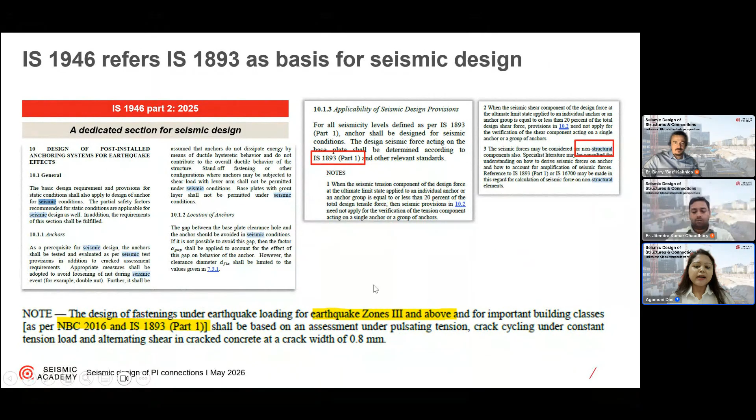So if I talk about the relation between global or international standards with IS 1893 - this left-hand side has some snapshots from the 2016 version, and this is the snapshot from the European standard for post-install anchors, EC2 EN 1992 Part 4, and Eurocode 8 EN 1998, which is for seismic design.

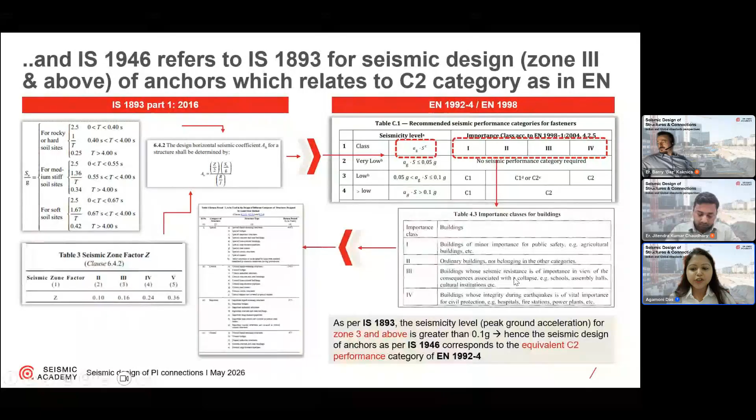In Eurocode 8, the higher performance category, C2, is referred to when seismicity level is greater than low. If spectral acceleration is greater than 0.1G, then for importance class buildings 2, 3, and 4 - not regular buildings of minor importance, but important buildings like hospitals, police quarters, civil protection buildings, fire stations - for that situation, when seismicity level is greater than low with acceleration value greater than 0.1G, the design needs to be done for higher seismic performance category.

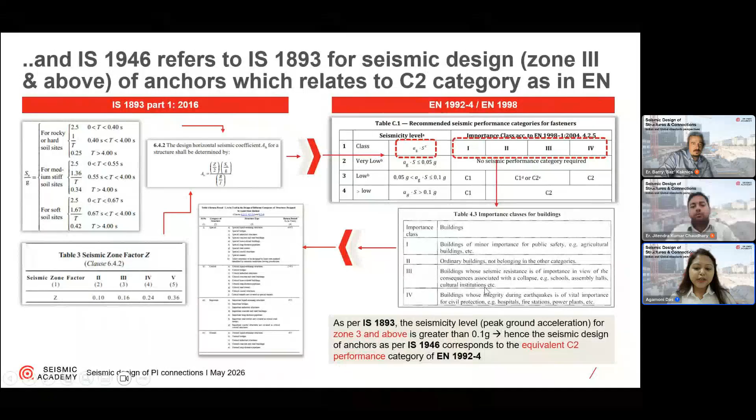And if we see IS 1893 Part 1, for zone 3 and above, the zone factor is greater than 0.1. So these two standards can also be correlated, and accordingly IS 1946 also states that for zone 3 and above, where the seismicity level is greater than 0.1G, the seismic design needs to be done for C2 or higher seismic performance category.

In the draft version of IS 1893, there is also one clause added on architectural elements and utilities, with a dedicated formula given to calculate the force depending on the mass of the non-structural element (W), and X, the height from the ground to the non-structural element, depending on which floor it is connected to, and also factors like importance factor and acceleration amplification factor. All these are mentioned to calculate the force on the non-structural element for seismic design as well, with different categories: acceleration sensitive, displacement sensitive, and combined.

So depending on the type of non-structural elements, some of which I've mentioned here, if we consider facade panels, that is displacement sensitive. If we talk about storage racks and tanks, that is acceleration or vibration sensitive. Based on this, the importance factor and acceleration modification amplification factors will also change, and accordingly force can be calculated as per the upcoming standard.

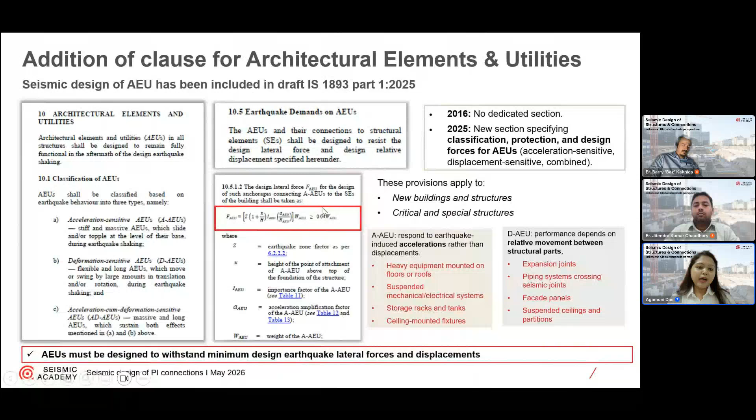So why post-install anchors under seismic loading? Engineer Kaknics already mentioned in detail, but I'd like to highlight a bit on that. For a building structure, if we talk about any connections or secondary structure, it is likely that there can be plastic zone formation as well. So in general, the crack width is higher than under static loading.

For static loading, we consider for anchor design a crack width of 0.3, but for seismic it is 0.8. In some cases, there can be plastic zone formation where the crack width will be even higher, because we cannot control seismic cyclic loading. It's a natural phenomenon. In that situation, anchor performance will drastically drop down.

In plastic hinge regions, we always recommend avoiding drilling and anchoring. But if we absolutely have to do it, then we need proper evaluation considering cyclic loading, alternating shear, pulsating tension, and all these different loading criteria, along with ground acceleration which induces deformation in a structure and transfers to connections. So for high rate cyclic loading and changing crack width, which happens in high seismic zones, it is important to design the connections which are post-installed.

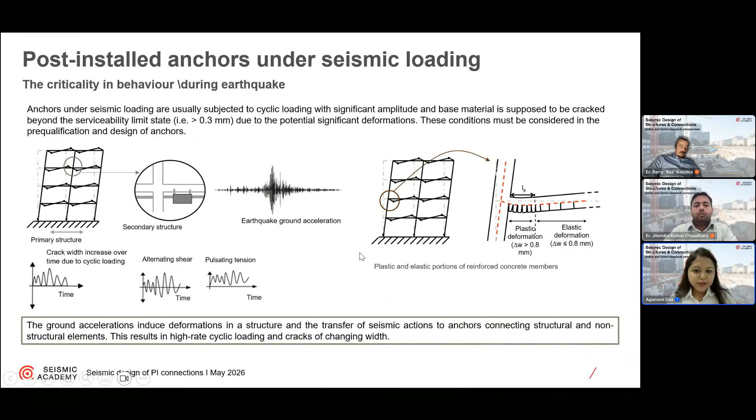So with this is the message: not only the structures but also the connections need to be designed for earthquake. Seismic survival starts at the connection sometimes - I think majority of the time.